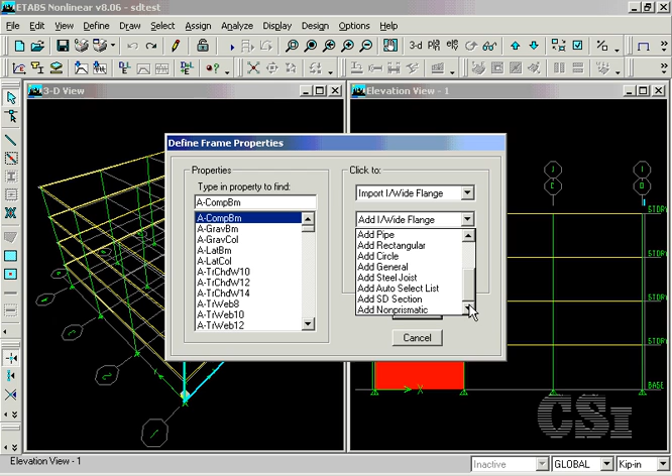The base material may consist of any previously defined material property, which identifies the type of design post-processors that will be available, as well as how the section properties will be reported. If we select concrete, we can then have the option of either no design or concrete column for the design type. When Section Designer is activated, we have templates for structural shapes, solid shapes, and polygons, which may be combined into a single section for ETABS.

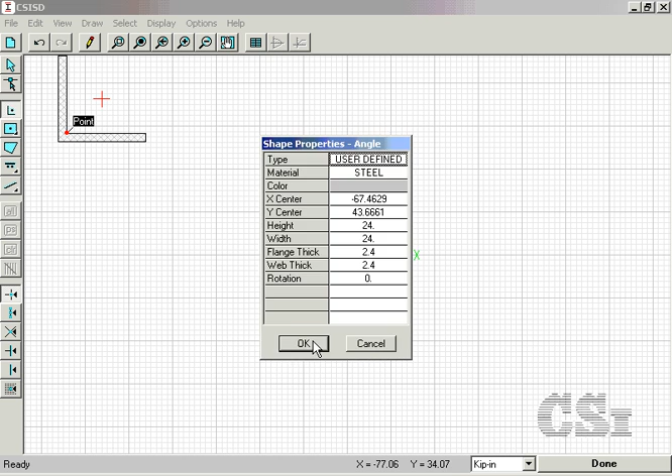The structural sections typically associated with steel shapes include wide flanges, channels, and others. A click on the grid locates the center of the shape, and a right click on the shape brings up the Properties box, where the material, size, and location may all be edited. There are also several solid shape templates, typically used with concrete sections. Again, a click on the grid locates the center, and a right click on the shape brings up the Property box, whereby we can alter the material, location, size, and reinforcing if concrete.

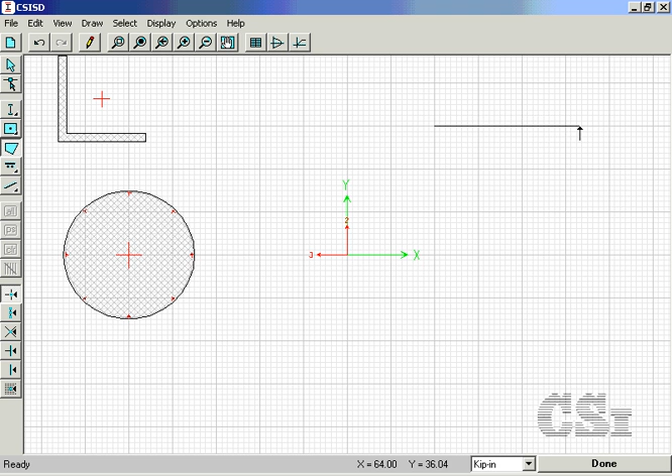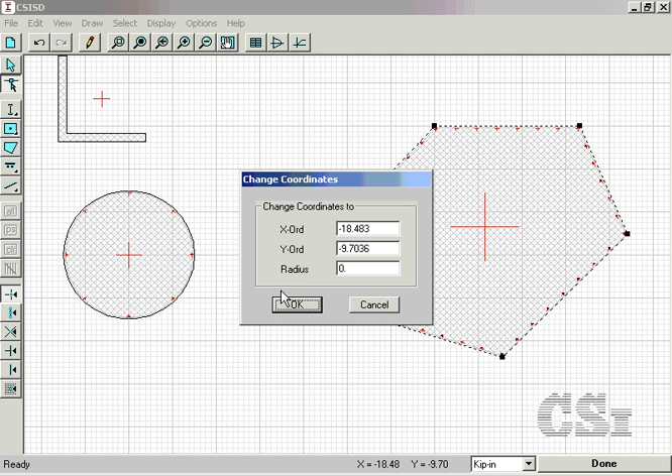Last is the Draw a Polygon Shape command, where the user can draw a very arbitrary polygon. Again, this would typically be used for concrete sections. The Shape Properties box allows you to specify the material, and if concrete, the reinforcing. The Reshaper tool allows you to change the geometry of the poly shape by either right-clicking on a corner and typing in the coordinates, or simply by dragging a corner. You may also use the Reshaper command to move the shapes.

At this point, it should be noted that all three of the drawn shapes constitute a single section, and though one of the shapes is steel, the Section Designer utility will calculate properties for ETABS based on the equivalent base material of concrete. It should also be noted that only the member 2-3 axes have meaning for ETABS, as the XY axes shown are local references only.

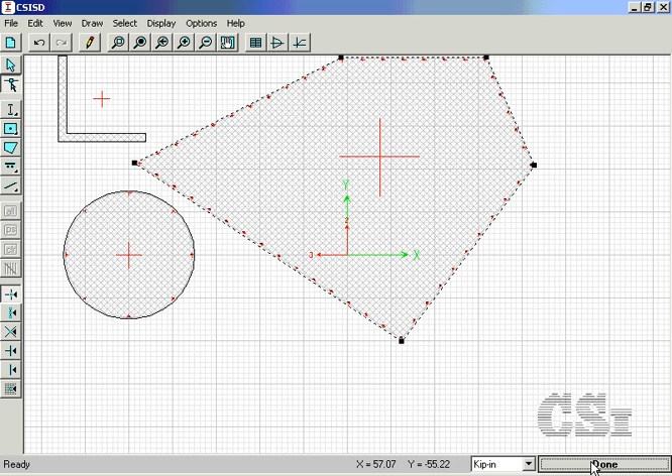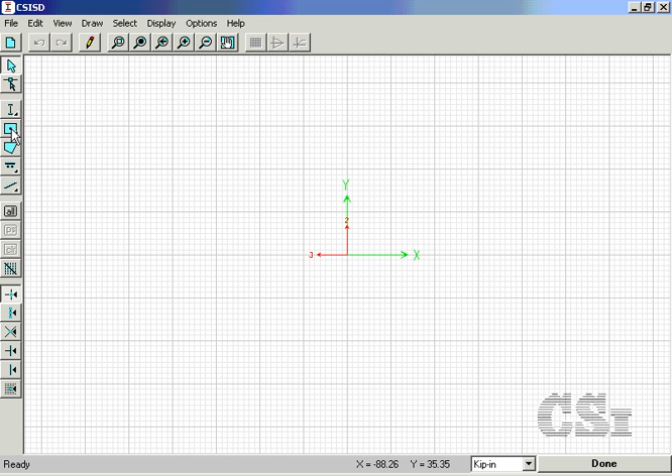For this example, we will create a rectangular beam section 12 inches wide by 16 inches deep. Reinforcing will be 2 number 8 bars at the top and 2 rows of 3 number 6 bars at the bottom. Cover will typically be 1.5 inches, except at the top where cover over the bars will be 1 inch. To draw the beam section, we will use the solid rectangle shape. A right click brings up the Properties Edit box, where we can change the height to 16 inches, the width to 12 inches, and ask for reinforcing.

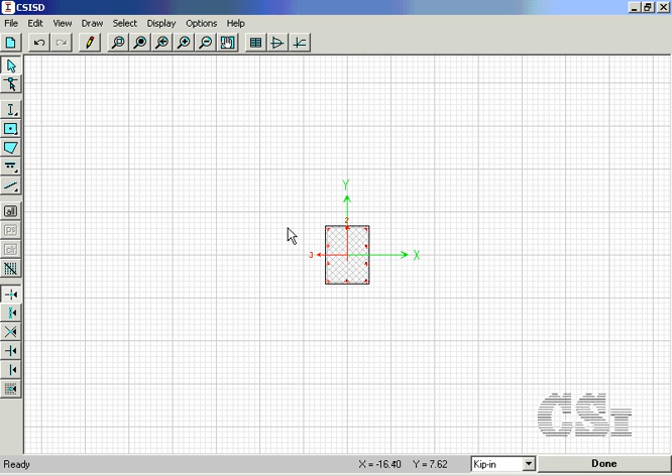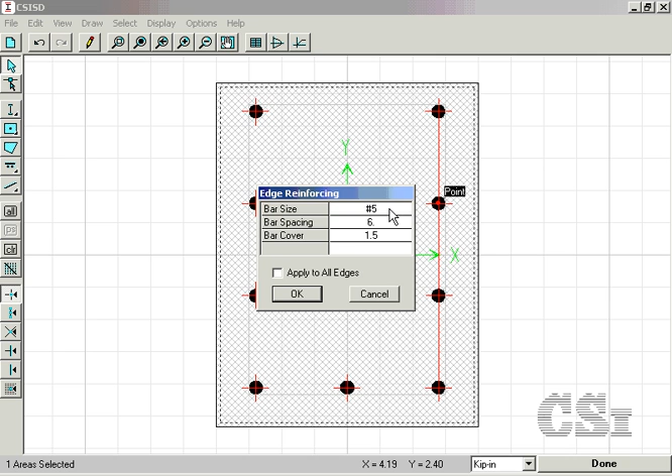Enlarge the view to make it easier to work with, and right-click on one of the edge bars. Set the bar cover to 1.5 inches and apply to all of the edges. Note that corner bars are located by the 2 adjacent edge covers. Right-click on the top edge bar and set the bar size to none, with a cover of 1 inch. Apply these changes to only this edge. Next, right-click on one of the right edge bars and set the bar size to none. Repeat this step on the left edge bars.

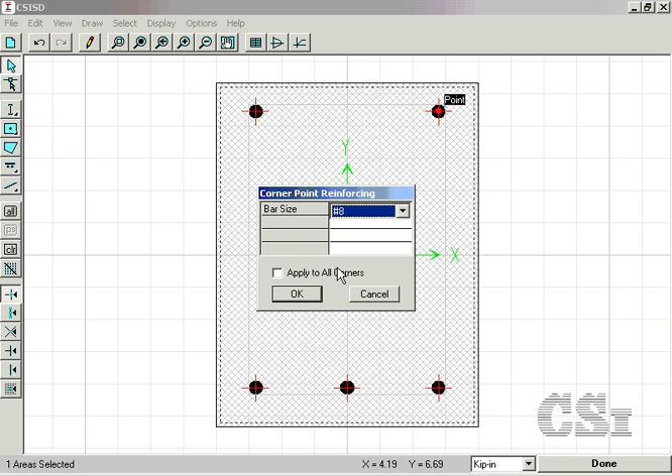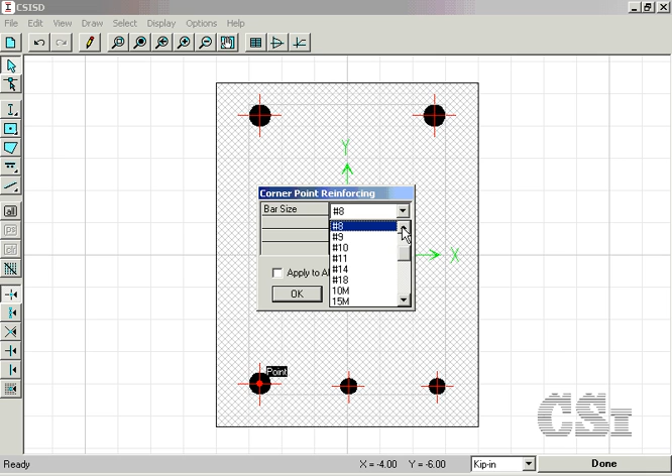Right-click on one of the top corner bars and set the bar size to number 8 and apply to all corners. Right-click on the bottom edge bar and set the bar size to number 6 with a spacing of 4.2 inches. Next, right-click on the bottom corner bars and change their size to number 6. The section is complete except for the needed second row of reinforcing in the bottom.

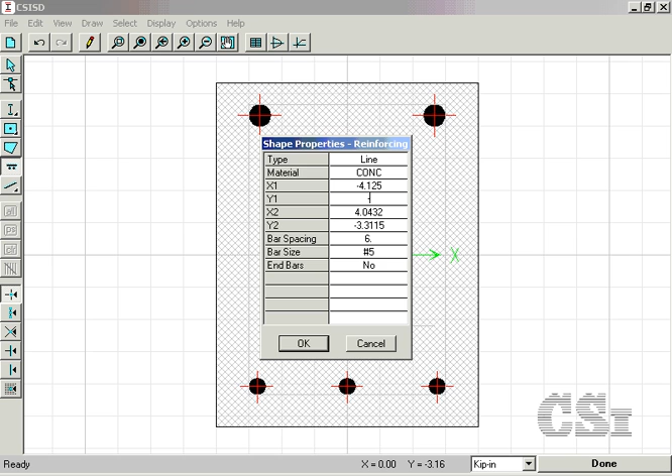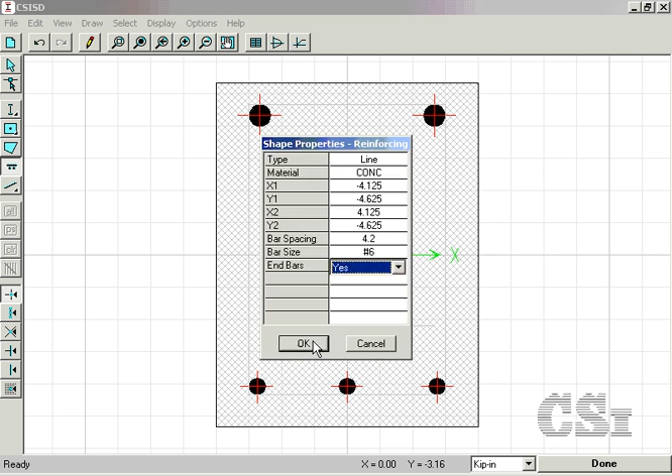This is done with the Draw Reinforcing Shape command, where we can add reinforcing bars as single bars, a line of bars, a rectangular pattern, or circular pattern. For this case, we will add a linear pattern, clicking to start and end the line. A right-click on this bar brings up the Properties Edit box, where we can type in the exact coordinates of the endpoints of the line. Change the bar size and spacing to match the row below, and ask that end bars be included. The section is now complete.

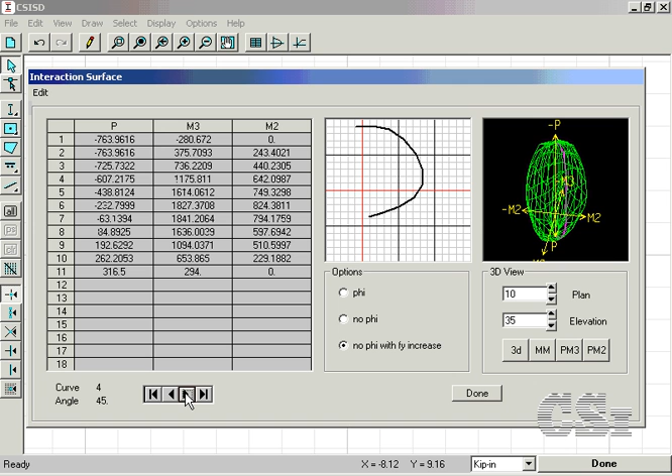Under the Display menu, we can ask for the calculated section properties, including the area, moments of inertia, and all of the other generated properties. We can also view the interaction surface, including a 3D view that we can spin around. We can also toggle through the various curves at different angle settings. Section Designer also lets you view the moment curvature curve for reinforced concrete sections. You may pass the cursor over the curve for specific values.

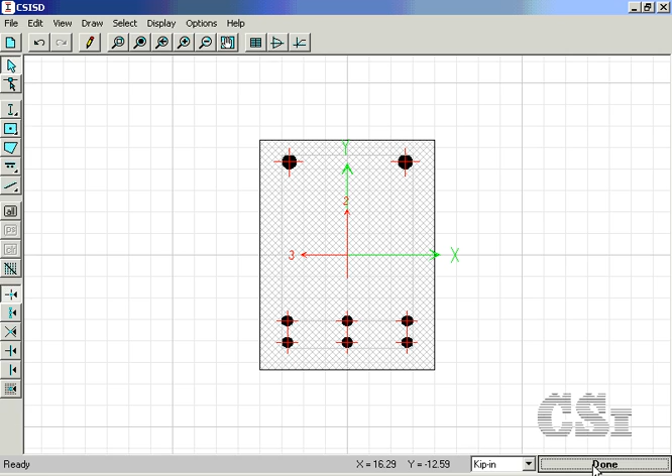The next step is to send the section information to ETABS by clicking on the Done button, and then OK to add the section to the frame sections list. Next, we will assign this newly defined frame section to the beams in our model. We will replace the conc beam property with the new SD property.

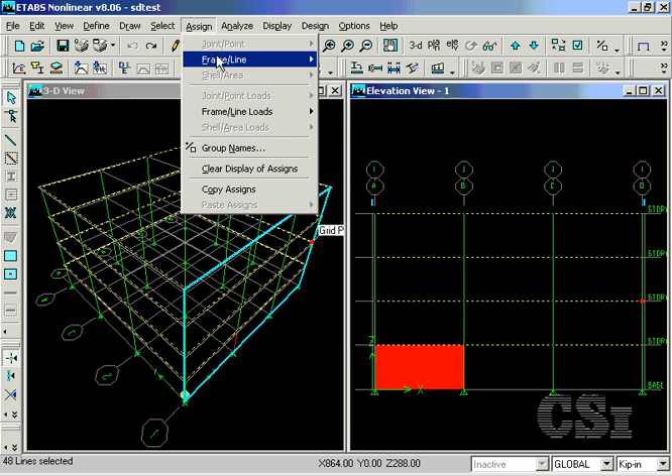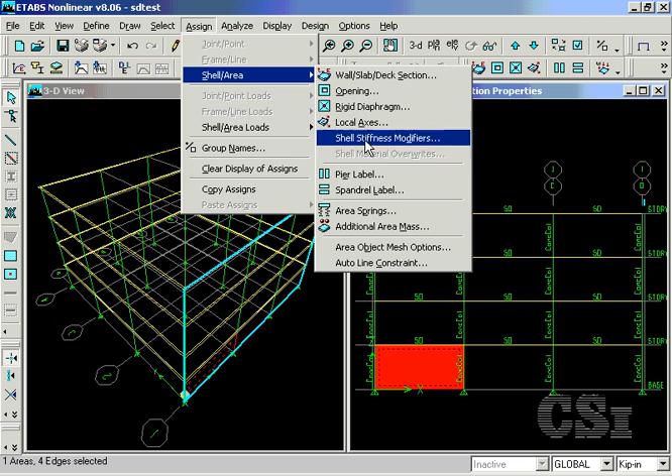As previously stated, we may also create or modify wall or pier objects in Section Designer. However, prior to doing this, the wall objects must be assigned pier labels. Assign this wall the label Wall Pier. Now we can go to Design, Shear Wall Design, Define General Pier Sections to access Section Designer. The base material will be concrete, and we will start from the existing wall pier, although we could create a completely new section as well.

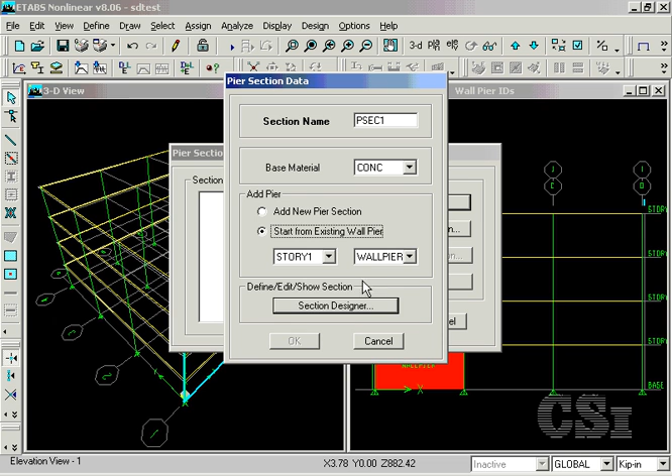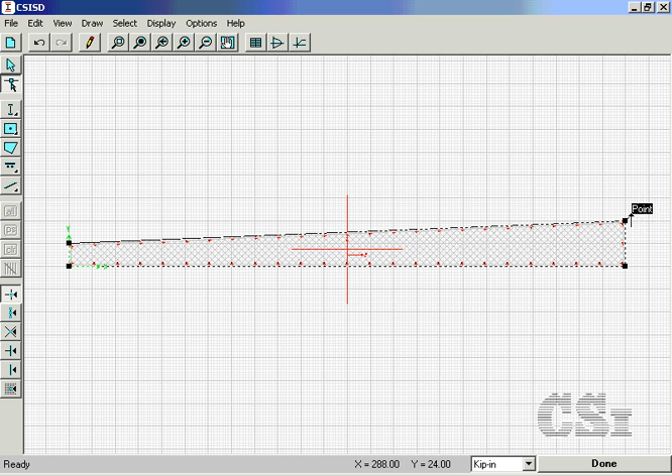The existing wall pier section is brought into Section Designer. The wall is a poly shape, so we can use the Reshaper tool, just like we did for the frame objects, to stretch and move the shape. A right-click on the bars brings up the Reinforcing Edit box, where we can alter the size and spacing. A click on the Done button brings us back to ETABS.

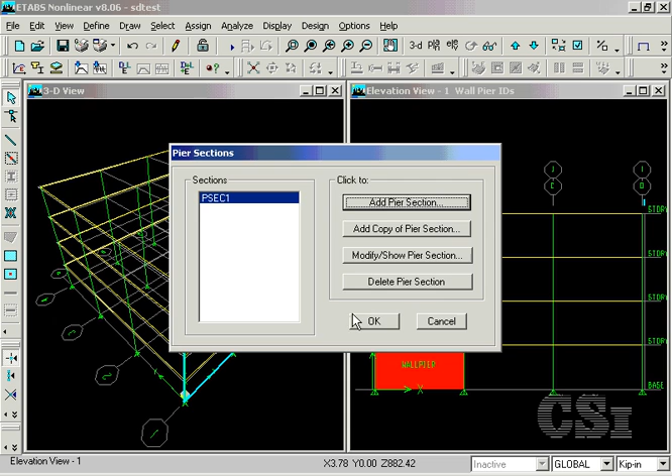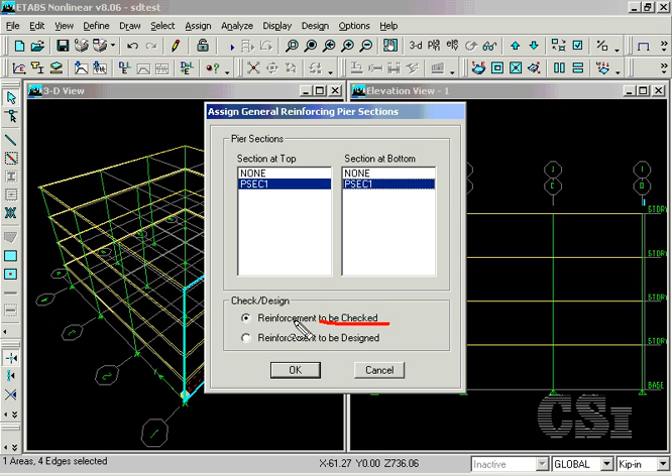Now we select the wall pier to assign the section that we just created. This is done through the Design, Shear Wall Design, Assign Pier Section Type. We'll use the General Reinforcing Section, PSEC1, at both the top and bottom locations. We will ask for the reinforcement to be checked. We are now ready to run the analysis.

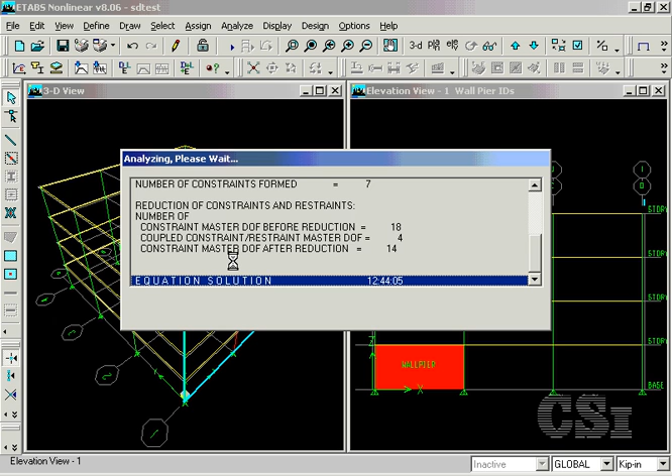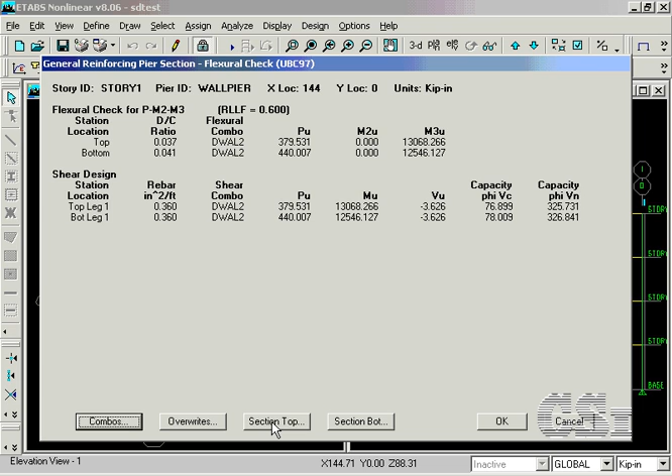Once the analysis is complete, we can start the design for either the concrete frames or shear walls. In this case, we will do the check for the shear wall to verify the reinforcing previously defined is adequate. A right-click on the section brings up the pier flexural check, where we can verify the adequacy of the reinforcing, as well as confirm the section used. This concludes this example.